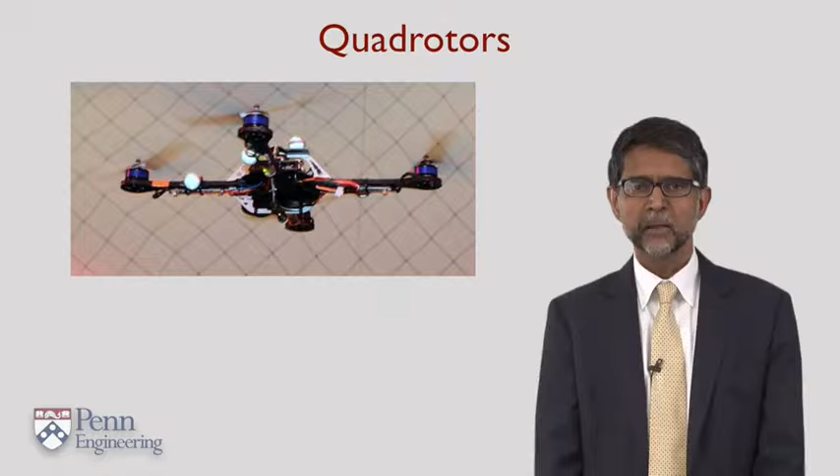The quadrotor geometry is quite simple. It consists of 4 independently controlled rotors mounted on a rigid frame. The mechanical simplicity makes it very attractive.

There are no flapping hinges. The blades are short and stubby, so even when the robot turns suddenly, the gyroscopic moments don't cause the blades to flap. This makes it easier to control the vehicle.

In the quadrotor, if you look at rotors 1 and 3 and rotors 2 and 4, they're pitched in opposite directions. If you look at the arrows denoting the directions of rotation, omega 1 and omega 3 are positive counterclockwise when viewed from the top, while omega 2 and omega 4 are positive counterclockwise when viewed from the bottom.

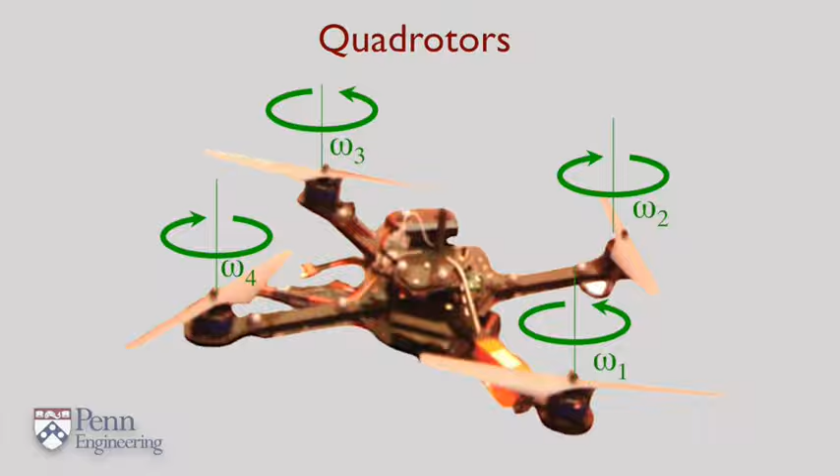If you vary the speeds of these independent motors, the rotors, you'll be able to control the position and orientation of the robot. Let's see how that works, starting with roll and pitch.

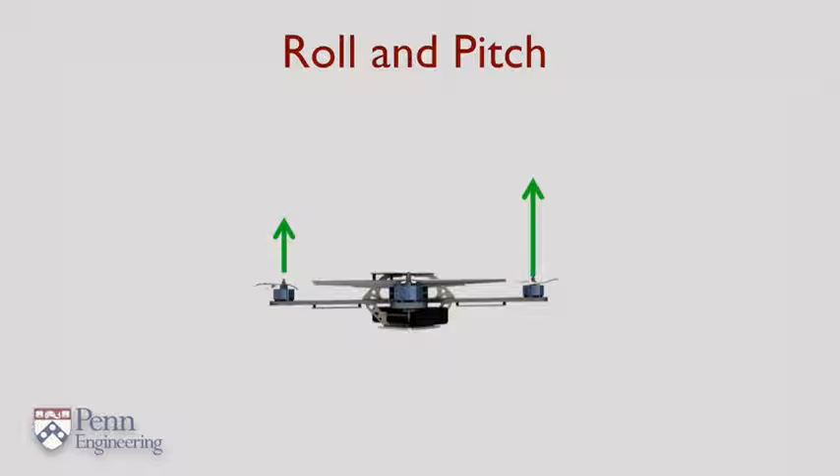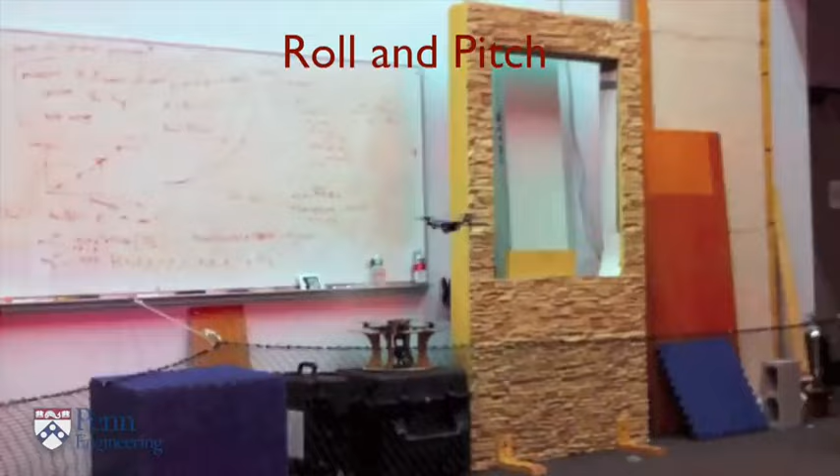If you take one of the rotors and spin it faster, you will cause the robot to pitch in one direction. If you spin the other rotor faster, it will pitch or roll in the other direction. This is what's going on in the video clip, except this vehicle is really small, and the roll and pitch velocity can reach speeds of up to 2,000 degrees per second as this vehicle autonomously performs flips.

One question you should ask yourself is, how do you get the robot to steer, or to yaw?

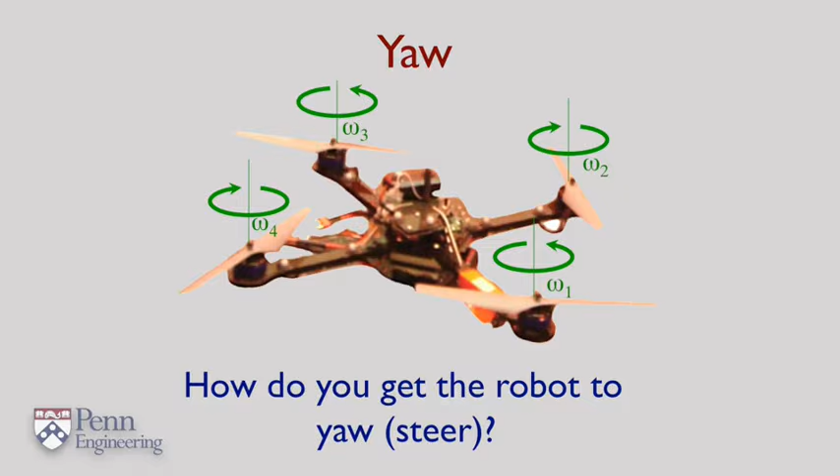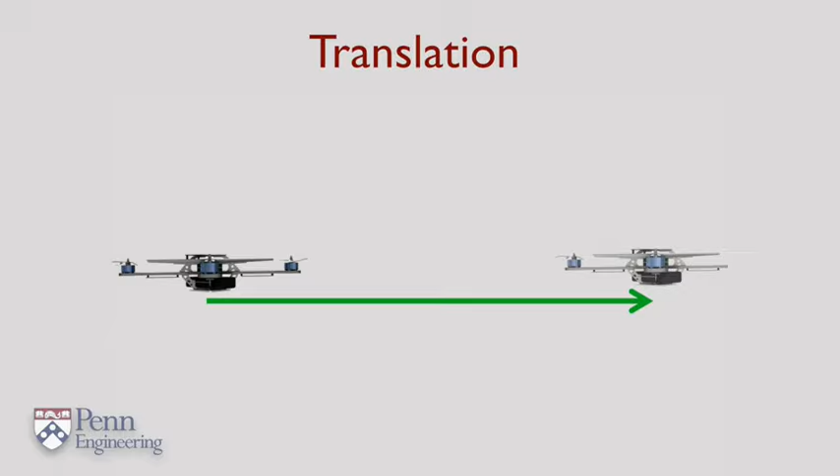Now let's look at translation. Imagine you want to move the vehicle from one side to another, just translating it along the horizontal direction. What you really have to do is pitch the robot forward so that the thrust vector points in the horizontal direction. That allows the vehicle to accelerate forward.

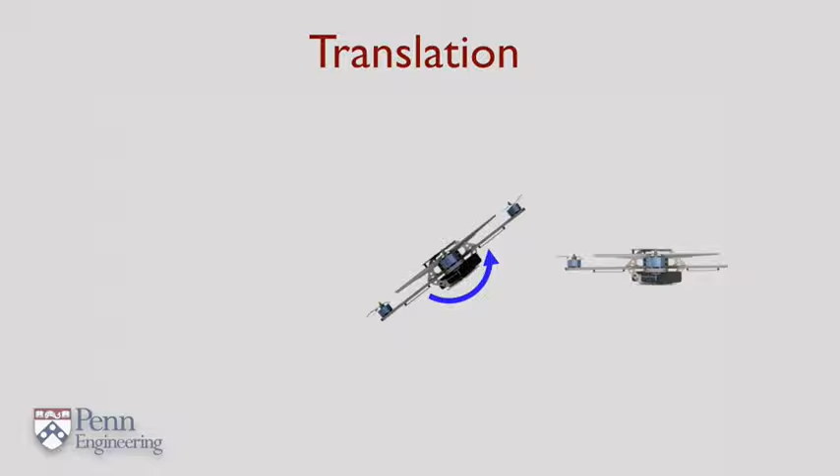But when you get close to the destination, you want to stop the vehicle, and for that you have to pitch it in the opposite direction, creating a reverse thrust that allows it to slow down when it gets to its destination. Then you have to pitch it back to equilibrium.

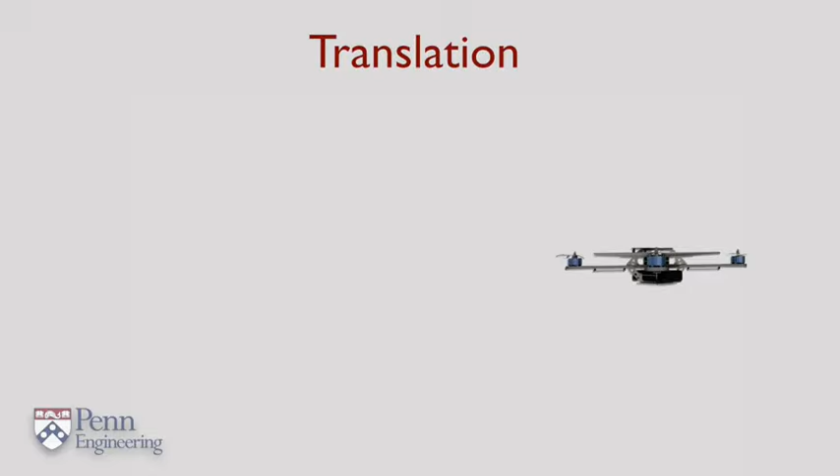So the translation maneuver can be quite complicated, involving rolling or pitching while translating. This is all happening autonomously as the vehicle goes through these obstacles — in this case, hoops.

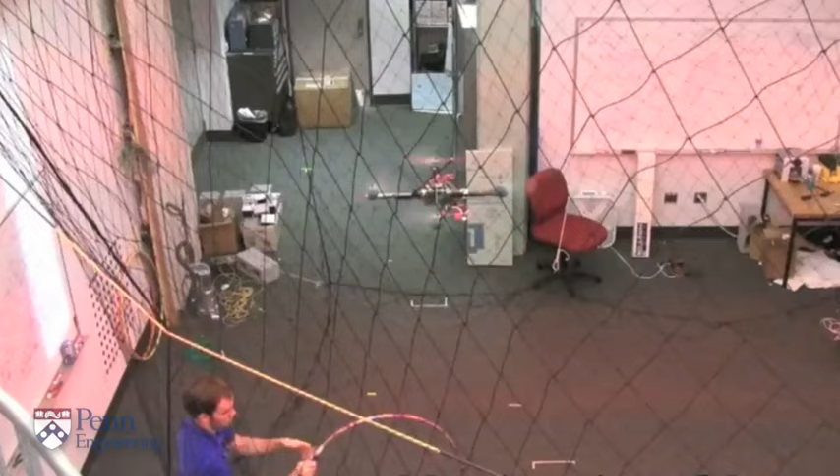The vehicle knows exactly where the hoops are, and all it's doing is planning trajectories as it goes through the known hoop positions. It can even do this if the hoop is thrown into the air, where it takes snapshots of the hoop, extrapolates the hoop's position, and then plans trajectories going through the hoop safely without colliding with any surface of the obstacle.

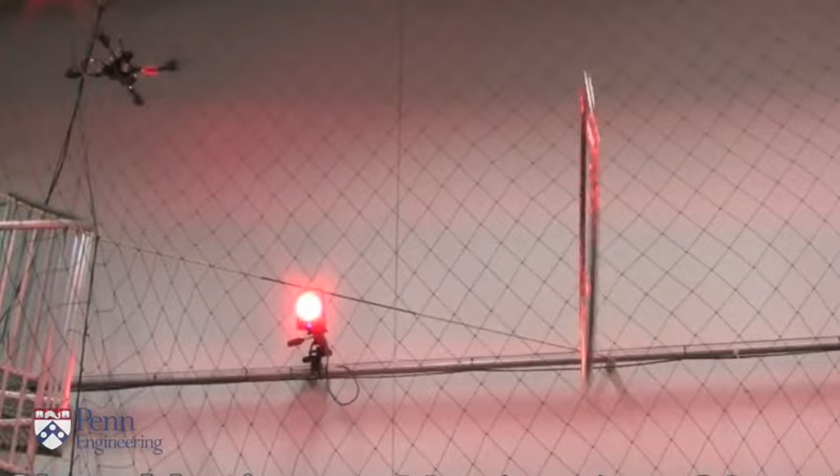Here's something else you might think about: the robot obviously has 6 degrees of freedom. It can translate in all 3 directions, and it can also rotate. So how many different ways can you translate or rotate the robot, and how many of these are independent, given that there are only 4 propellers?